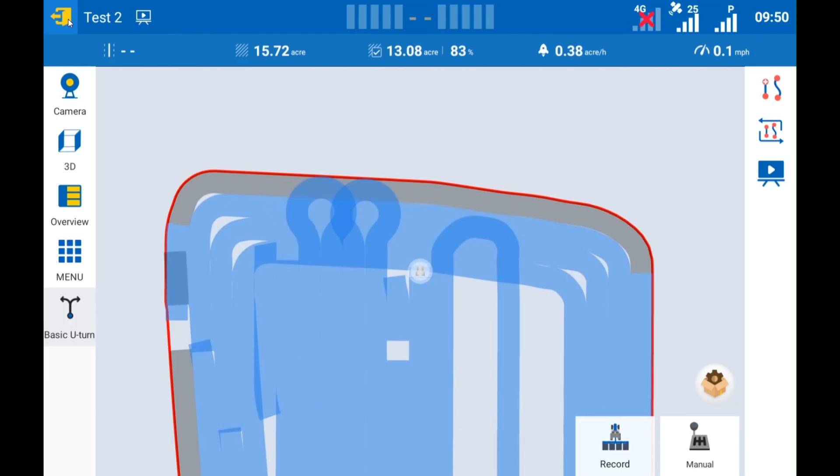So now we are going to shut this job down. We're going to hit the stop button, confirm exit task, yes. So now that task is shut down and gone away.

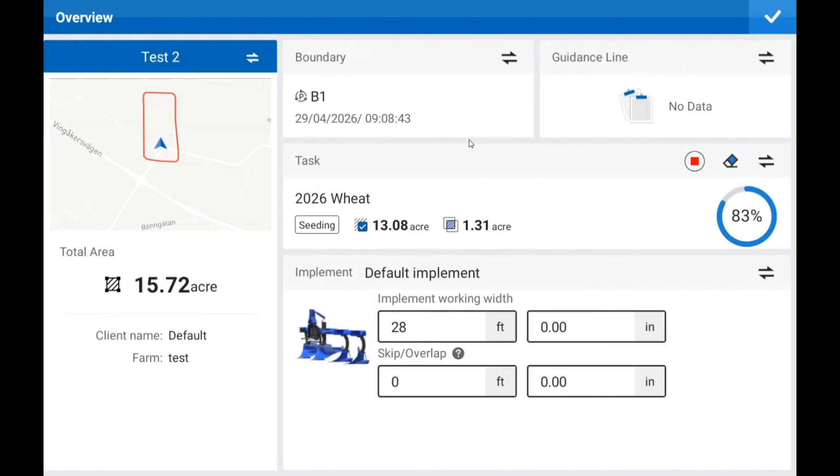Now we'll go over here, we'll go to overview. We want to select a field, we'll just leave it in test 2. We're going to select our boundary. We like that boundary, we'll use that one. So there we are. But now what we want to do is we want to shut this task down, and we want a new task.

So now we're going to do harrowing. We're going to do okay, okay. There we are. So now we're back in the same. And we can select our guidance line. We'll use this one exactly. Hit okay. Everything's set up now.

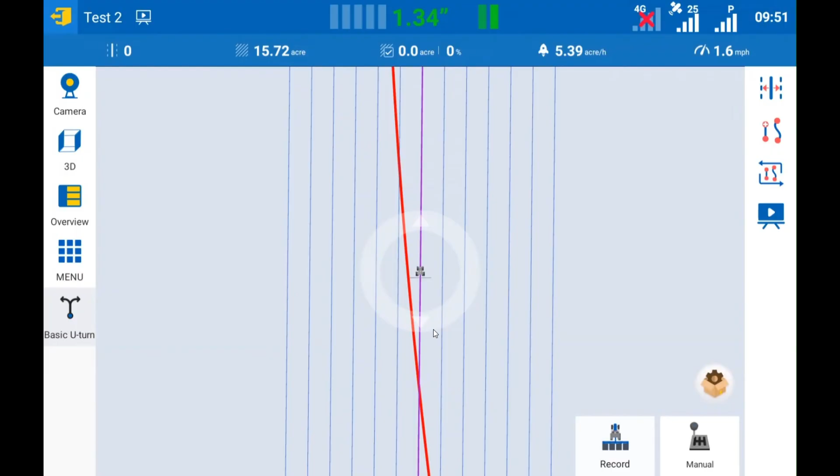Now we're back in our field, and we're on a guidance line, and we're ready to work it again. But now we want to do something a little different here. But we're going to go to this one, which is, I have no idea what. We'll name it test, question mark. Okay, okay, okay, so, oh, that's diagonal harrowing.

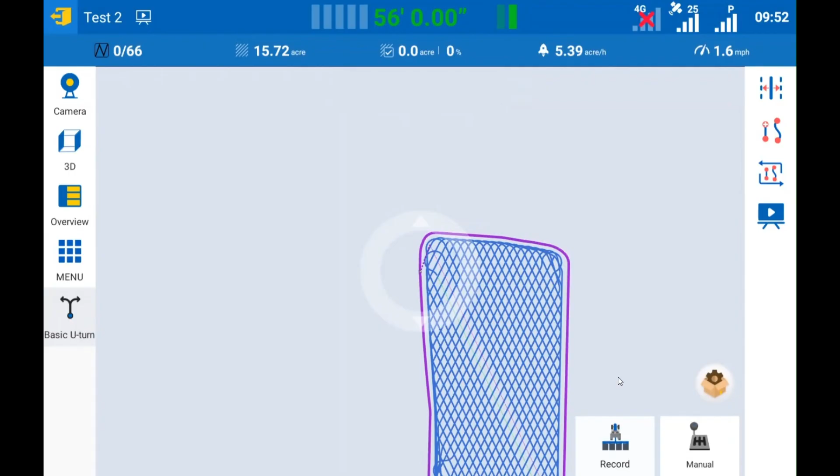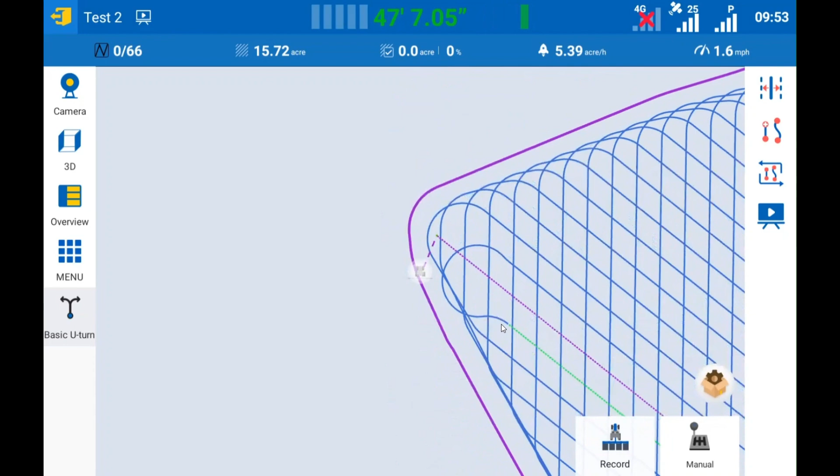So now the whole field is mapped out. So now what we need to do is we need to drive ahead to that starting point. This would be if you're harrowing a field, say 2 times after you've seeded it or something. You get the entire field harrowed twice in a perfect pattern without you having to do anything.

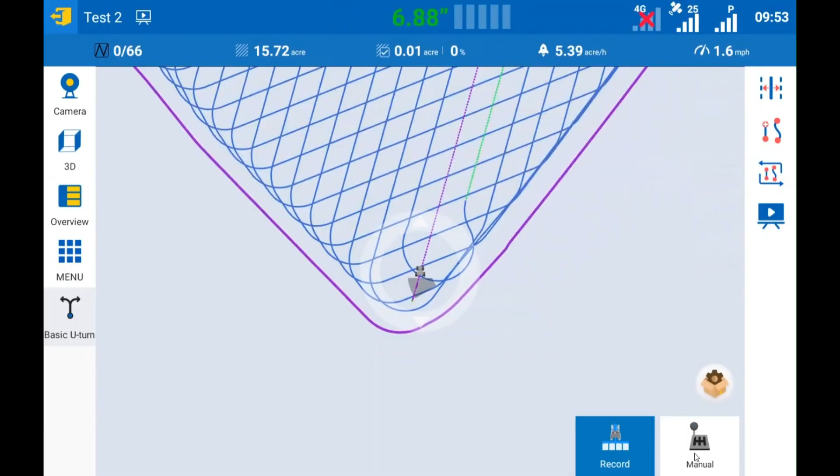So we will start recording and we will engage auto steer. Oh, we're a little bit too far off the line. Now maybe it'll go. There we are.

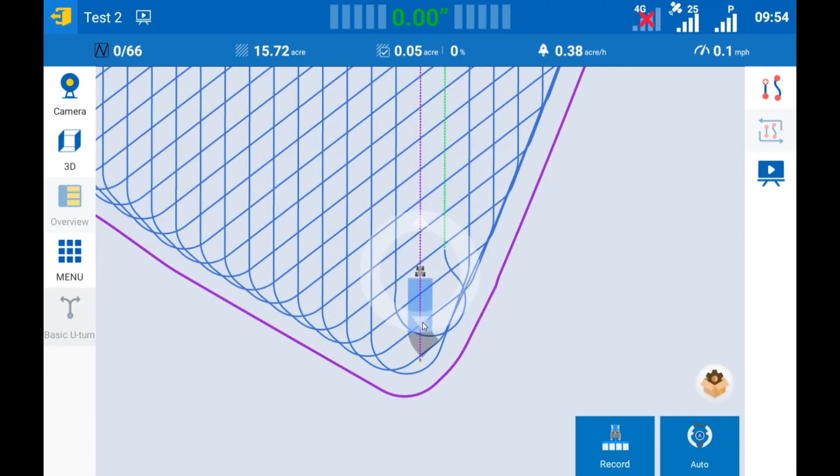So now we'll go down the purple line, and then we'll come back on the green line, we'll turn around, and this will be an interesting thing to watch. Well, let's do actually, most of us don't pull 28-foot harrows, so we will go to overview here and quick change the dimension of our implement.

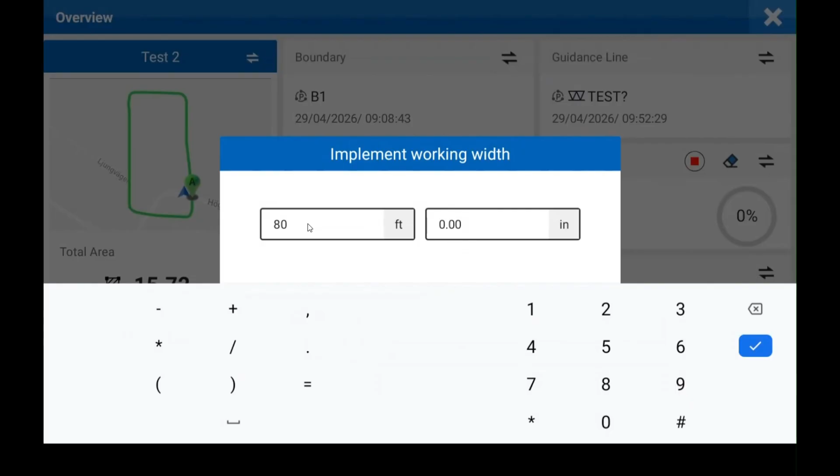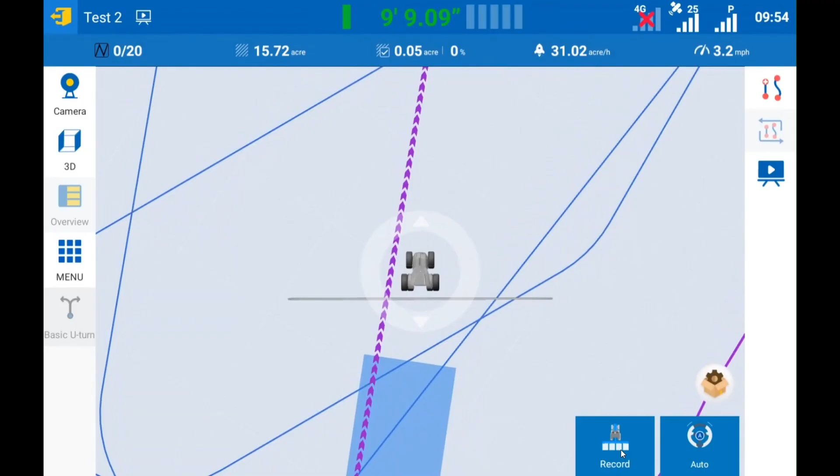We'll change this to 80 feet, which will make it a lot more interesting. And our path planning is done. We'll drive ahead. We'll hit auto. So now we can see it's going to be a bit easier to understand what's going on here.

So we'll just get ripping. That would be the main function that I see for this one. If you're doing 2 passes of tillage in one day, or like I said, 2 passes of harrow, it gets every part of the field that it can while auto steering, without any intervention on your part.

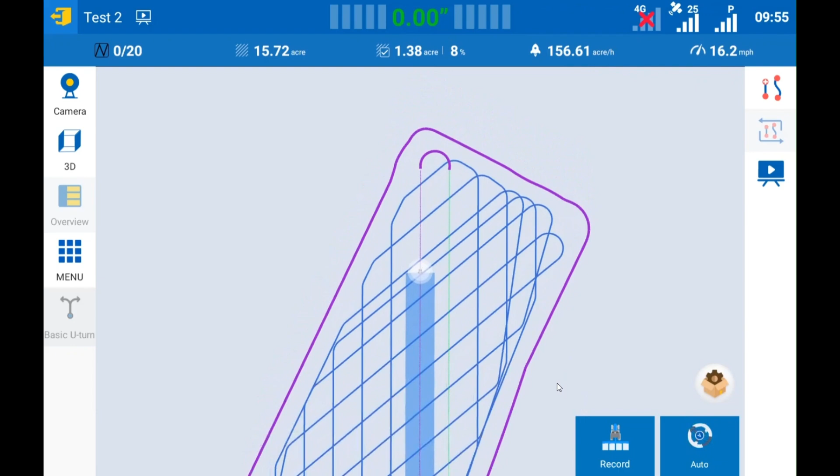So we'll slow it down since none of us want to turn around at 16 miles an hour with an 80-foot harrow. We'll slow down to 4.8 miles an hour.

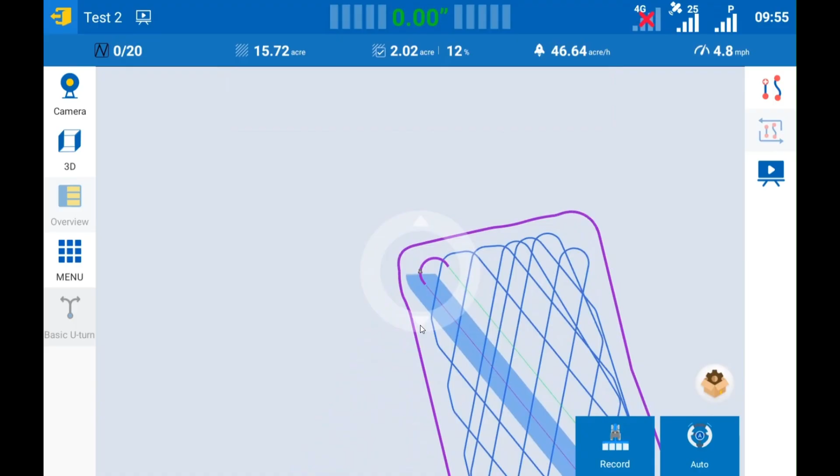It keeps you a safe distance back from the headland, so you're not dragging your harrow through the trees. And it won't necessarily map it out in the way that seems the most sensible to us. But if you want to use it as it's designed to be used as much as possible, then it's pretty neat how it works here.

You can see that purple line there. It's going to take over when we get to this end of the field. I'm going to slow down again here. So now you can actually see it's going to start on that other angle because this part of the field has already been harrowed in one direction.

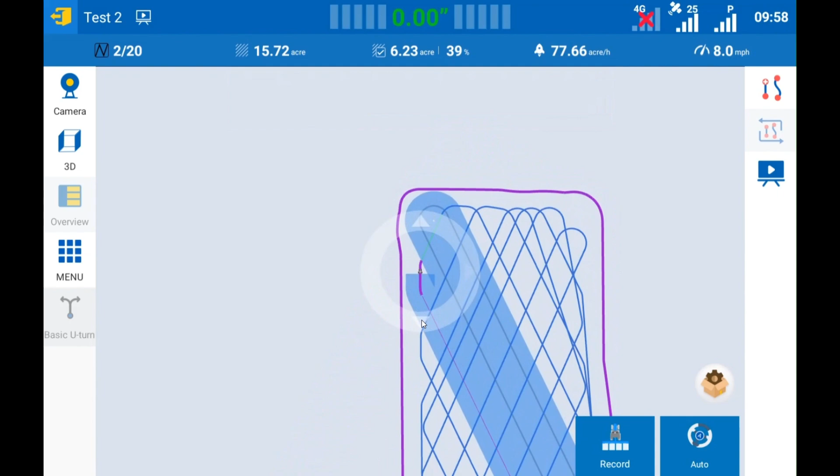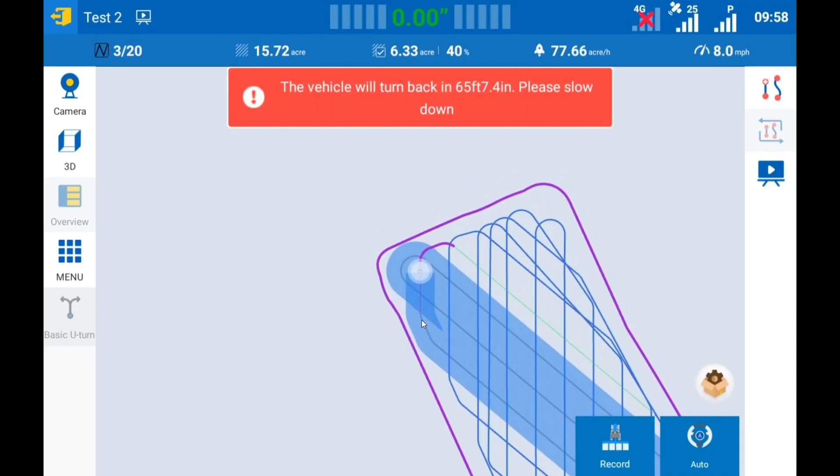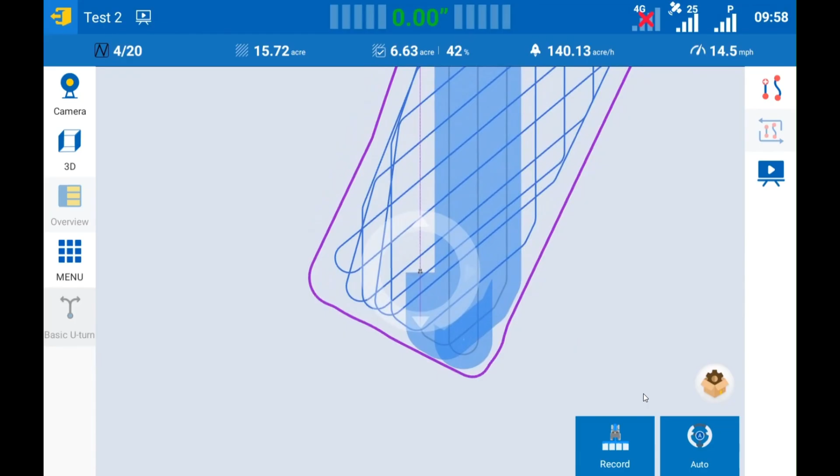Now this is starting the second pass already. And because in this area of the field there's not enough space for it to turn and do another line, that's why it's just left it out. So it's pretty ingenious, actually. You can see this whole time, I'm just letting it go. It's doing all the steering and all the planning.

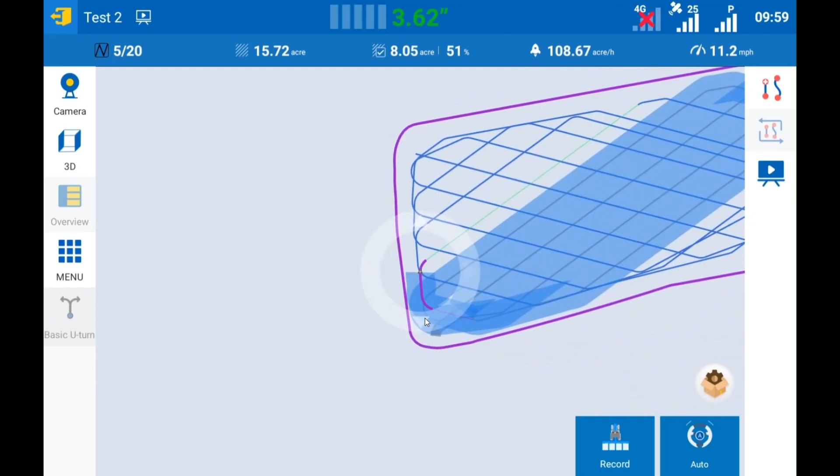So again, here we're going down the headland a bit, and we're going to do another of our second diagonal passes on the other side of the field now. So you're turning into our diagonal, the other angle diagonal. Now we're back on our second pass again.

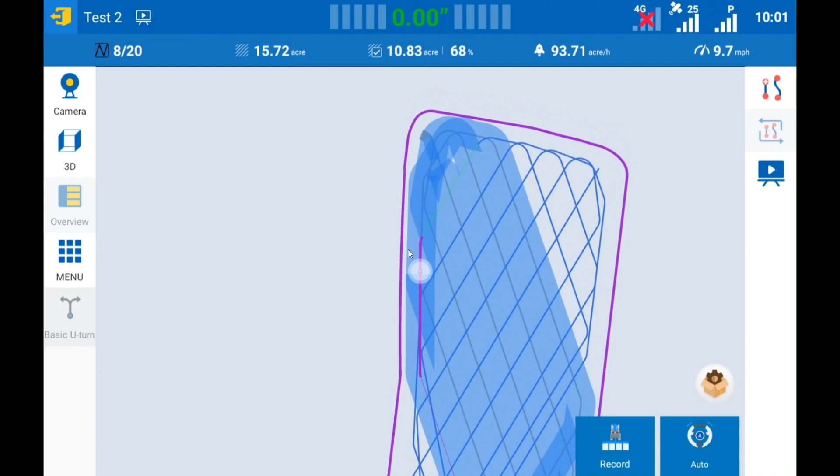So you can kind of see by the colors where exactly you've done a single pass, where you've done a double pass, and where you've got a triple pass in. So I'm actually really impressed. There's this area here where you've actually gone 3 times, and then like small areas. But so far, it's almost doing just a perfect job of hitting everything 2 times.

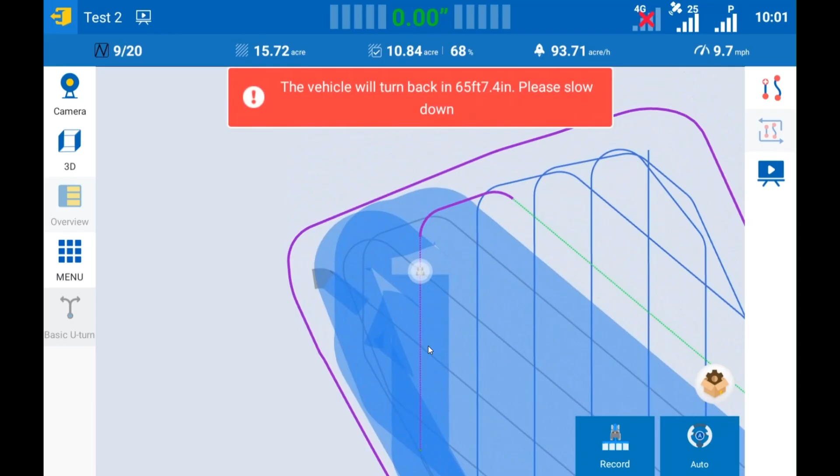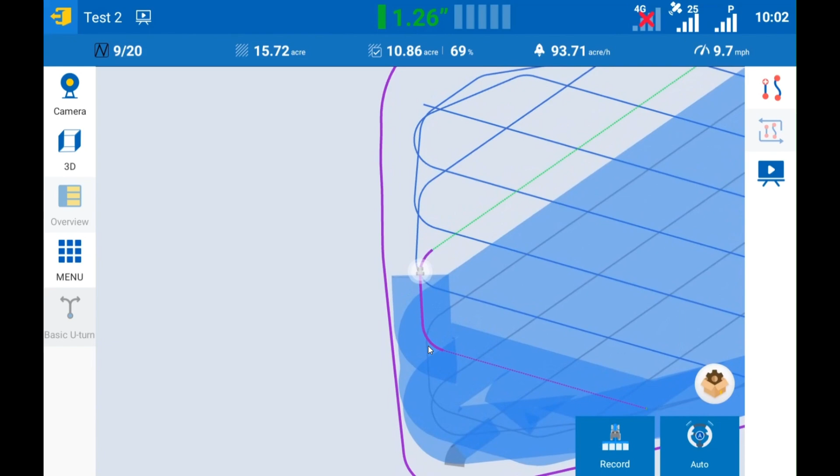So this is the first time I've been using this diagonal harrow feature in its entirety on my demo unit, and I'm blown away by its functionality. So here we're going to have a bit more triple overlap right here.

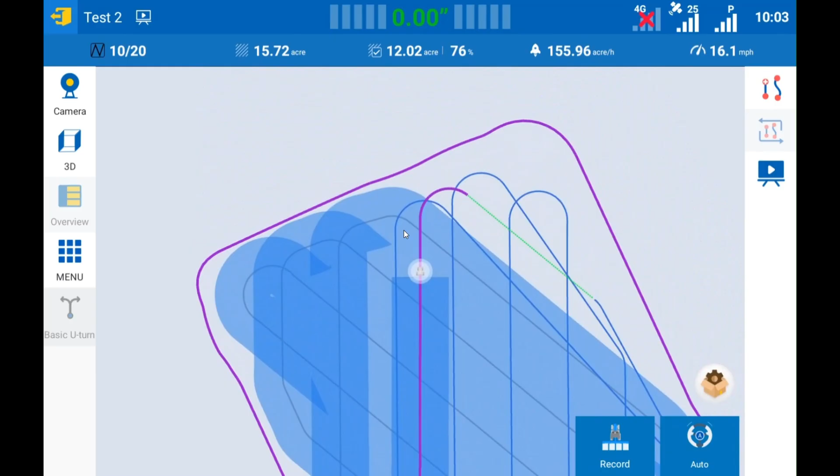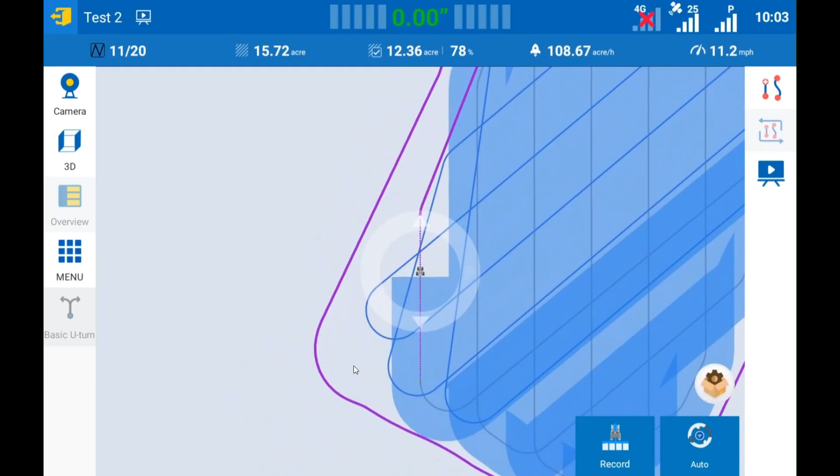So this is interesting. I saw these two lines close together, and I'm like, what's going on there? So here we're going to have about half a pass that's full double overlap, triple overlap, I mean.

So now I guess it doesn't feel like there's any way for it to get another pass in here that's long enough to count, so it's just discounted that completely. And we'll get that with these other turns here. So now, except for that other corner, we're pretty much done our first pass, and now we're getting on to our second pass.

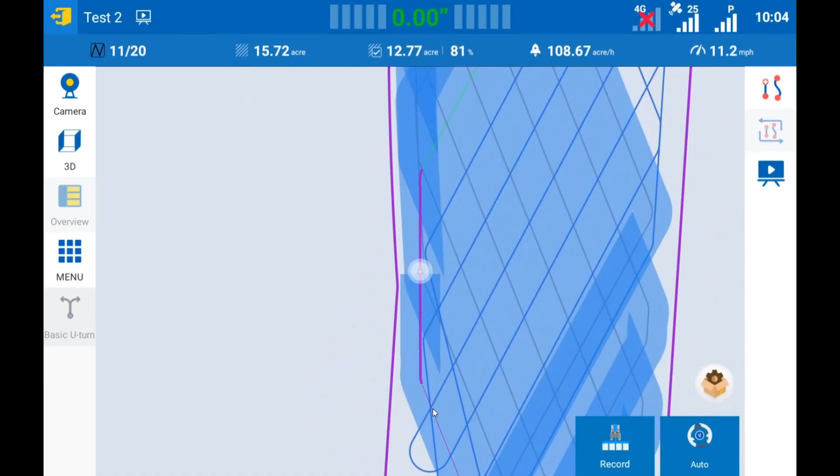So to me, this here doesn't really make any sense why it would do this. Why wouldn't it just go back down this way? But this is its plan. We'll just let it do its thing.

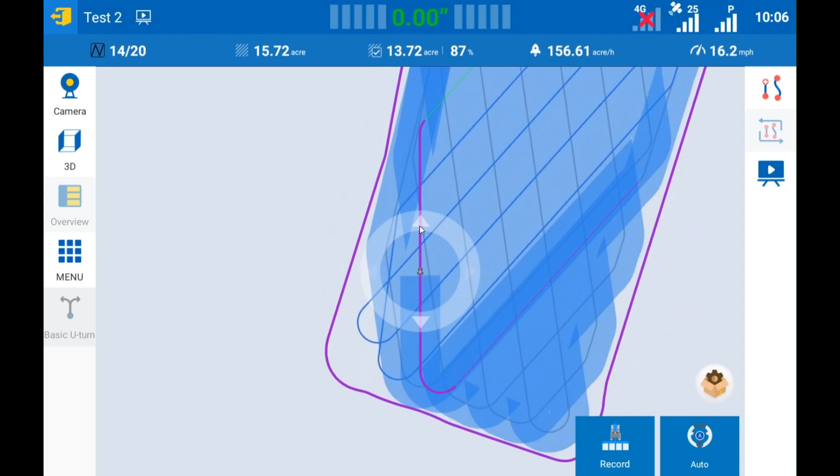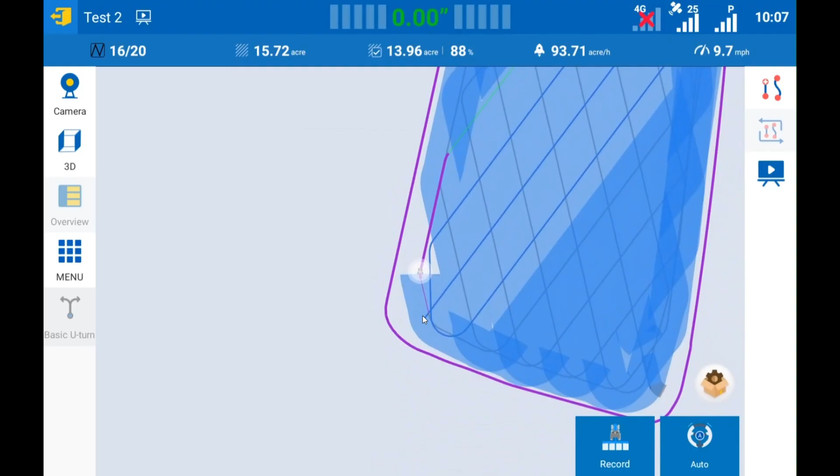So that's as close as it feels comfortable getting to the corner. So you'll just have to do your headland pass once you're done to get that wheel right on the edge, but the rest of the field is going to be completely done two times.

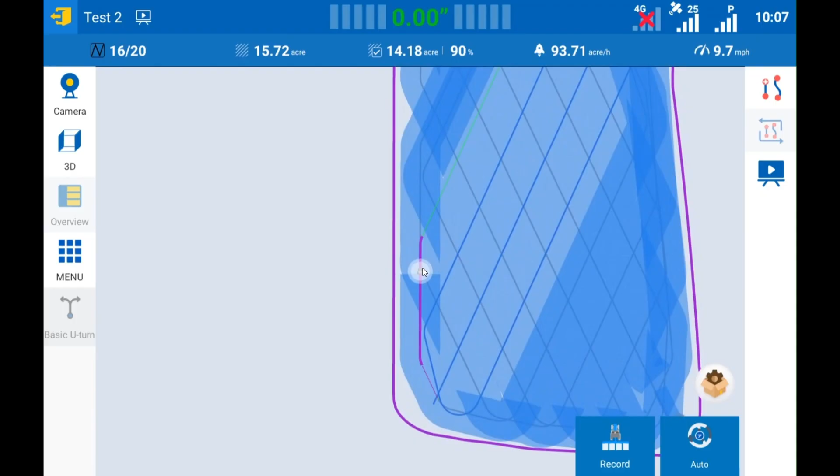Oh, and something you'll notice here, which I hadn't noticed, is that this counter is only counting to the maximum of the first pass. So you can see that now it just counted up because it swung over this part that had previously been untouched.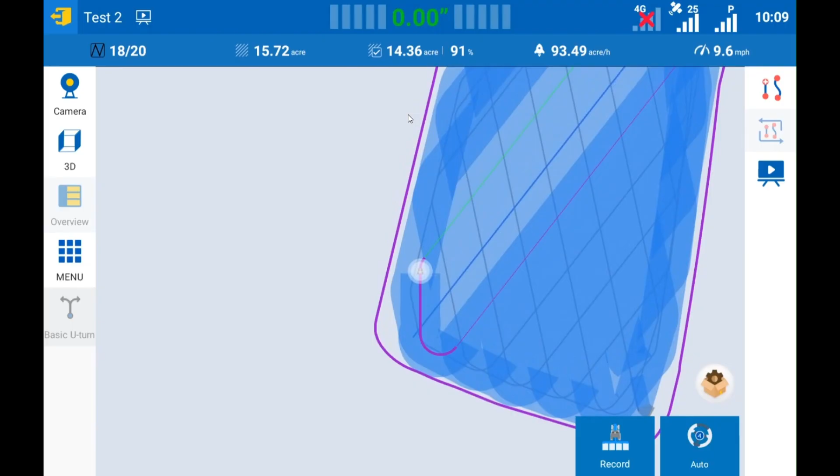So we'll see here how close we get to 100%. So far, we've got 1.4 acres that hasn't been touched at all. So although it's painting as double applied or double overlap, it's not counting acres as double overlap. So that's actually a really cool feature.

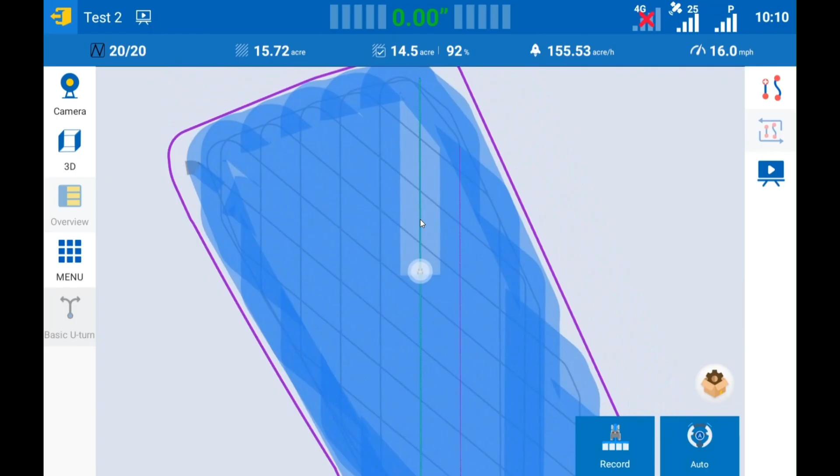So now you're coming to the end of your last pass there. It's going to just keep going straight now, so you'll have to take over control.

And we're going to try something here, something I've actually... Diagonal line will be completed. Please slow down and prepare to stop. So it's warning you, so it's going to stop here. Well, it's not going to stop. We're going to have to stop.

So there you can see at the top, we got 92% done. We got 1.2 acres that's not touched yet. So here we are, we're at the end of our line. Diagonal line completed.

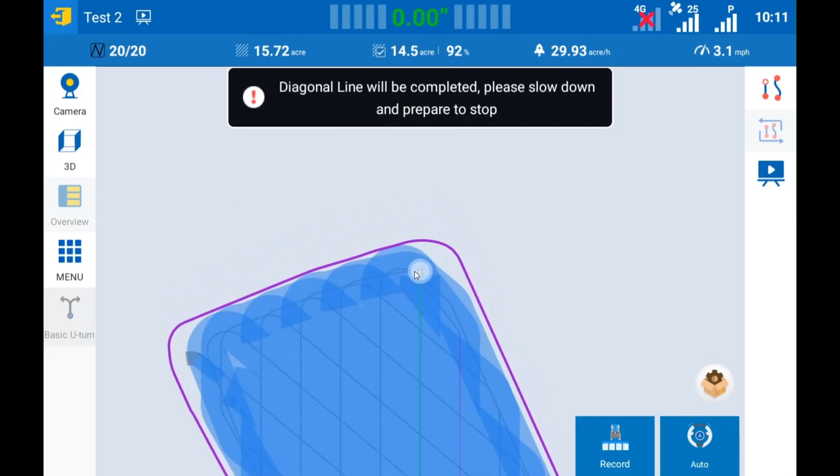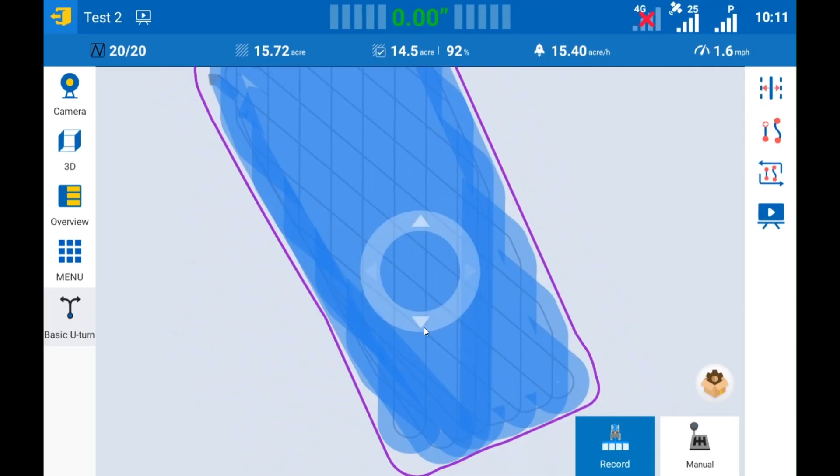That is really cool. So you can see a couple parts of it did get triple pass, but not actually a very large area, considering.

So now we're going to try something I haven't tried before, but we're going to go back to this one. We're going to do a headland pass. And we're going to select our heading, which is this one, 15.7 acres. We're going to go here.

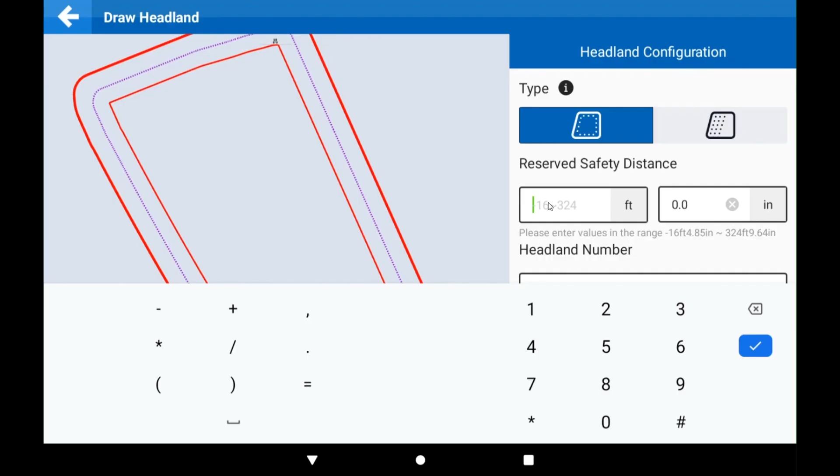Now, because we actually want to be right on the edge of the field, we're going to select just one foot. And we are going to do headland number one, because that's all that actually needs to be harrowed. So now we'll hit OK.

Now we will speed up again. We'll turn this away. We'll turn record on. And we will engage auto steer.

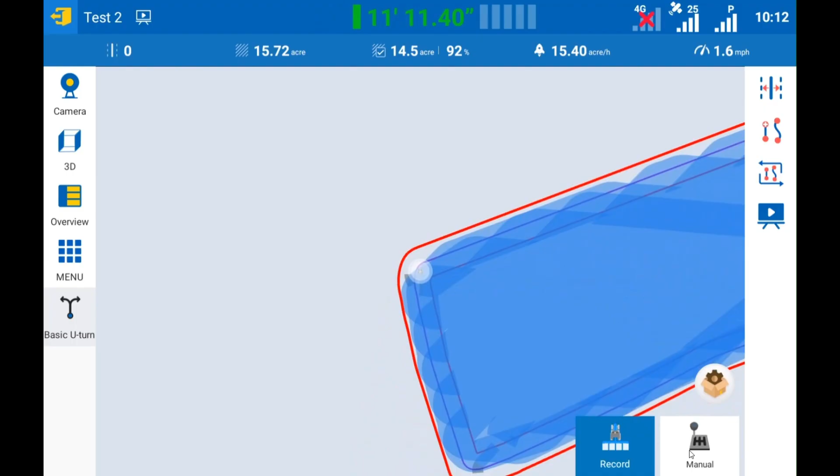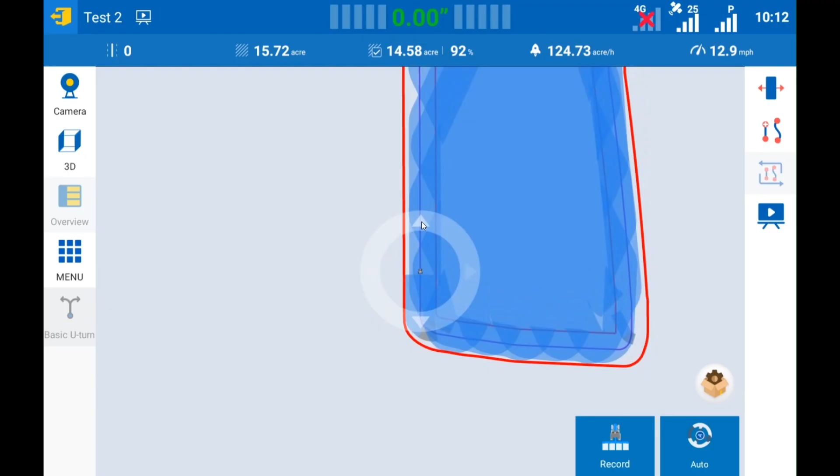So here we are, 14, it's counting up again. And we don't even have to drive our headland pass after we made that boundary on our last task. Which is tremendous, this is really cool. I'm learning stuff here as well as anybody else.

So you can see we've got our offset set to one foot. And we're ripping.

And our total percentage here is just counting up. Now we're coming to that little dog leg we made in the boundary. We're coming to the end of our boundary, actually, so we're going to turn down the headland.

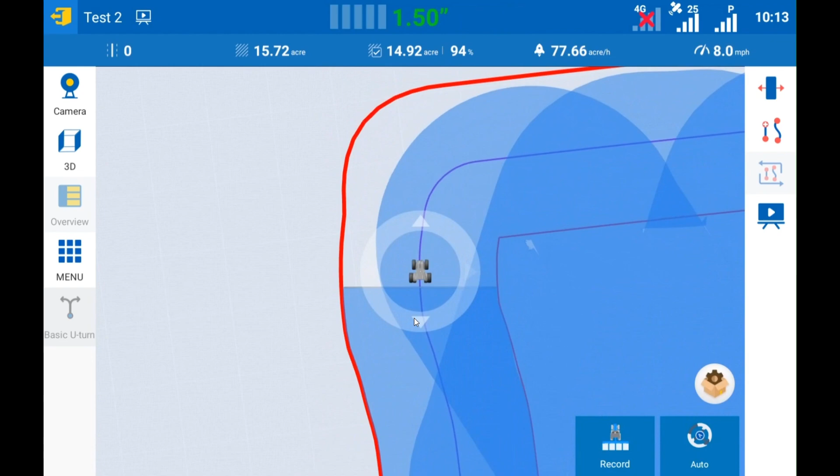So there again, we're not right in the corner, but for a computer doing it, I'm totally blown away. So now we're already up to 94% of the acres are completed.

And this is all without us having to do any steering at all, other than getting on the line at the beginning of the field and then turning back onto the headland pass here at the end of the field. So that's a very, very powerful set of tools that this GPS gives you.

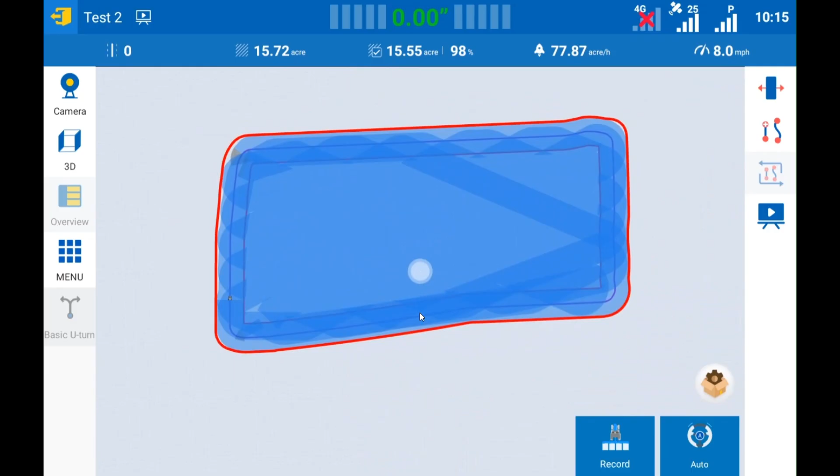So there we are, we're coming up to the end of our field, completely done. We're at 98%, so we'll be just about have her all done when we get here.

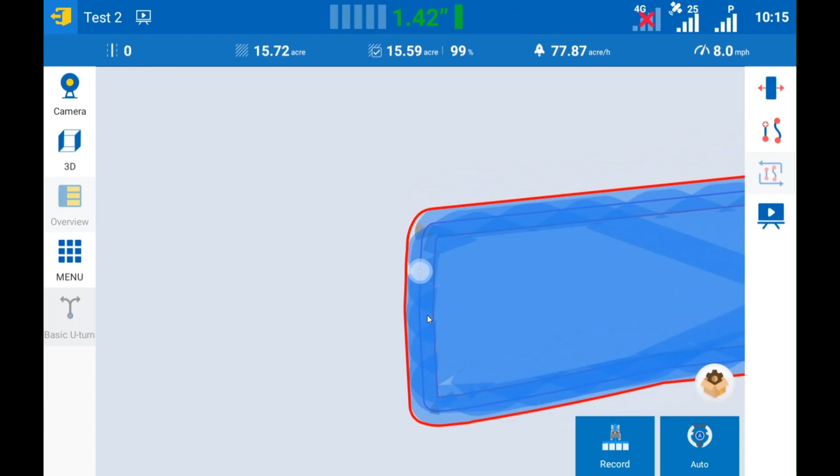So we got a few little tiny pieces in the corner that aren't done, but otherwise the whole field was driven without having to put our hand on the steering wheel, other than those two times like I said before. So this is impressive, very impressive.